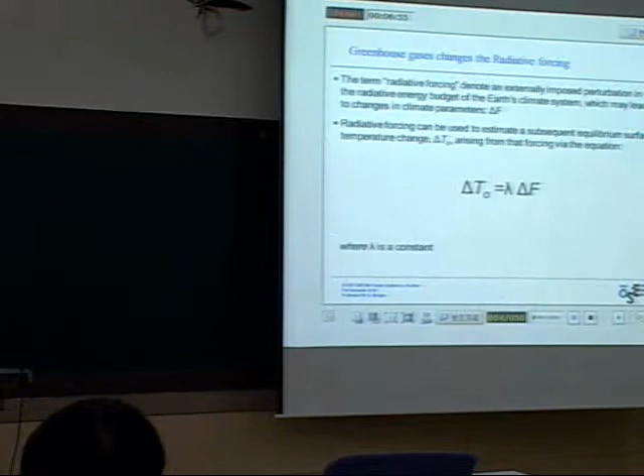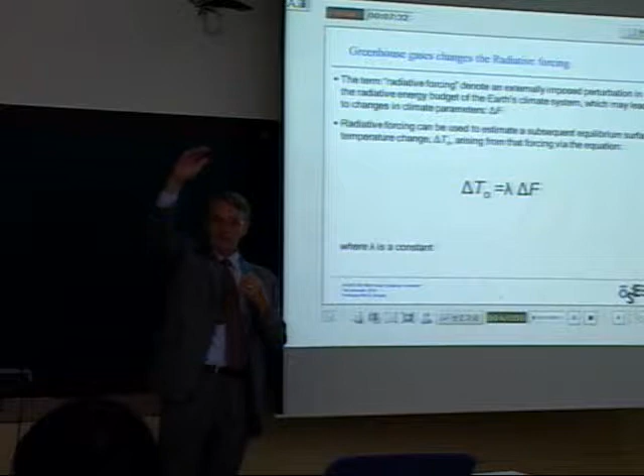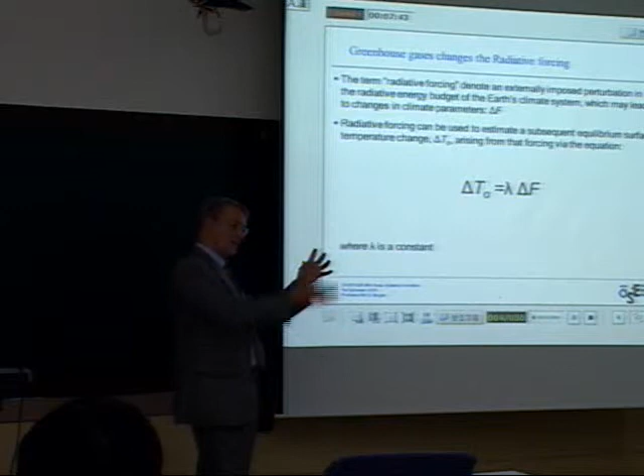So there's really a lot of very complicated technology going into this. One of the most complicated things is also the chemical reactions that take place in the atmosphere under certain conditions. One is also talking about the half-life time of these gases. For instance, when you send CO2 up into the atmosphere, it doesn't stay there forever. It's gradually disappearing, but of course we are feeding all the time more and more CO2 into the atmosphere. So it's kind of the net effect of disappearance and feeding new CO2 that is the mechanism.

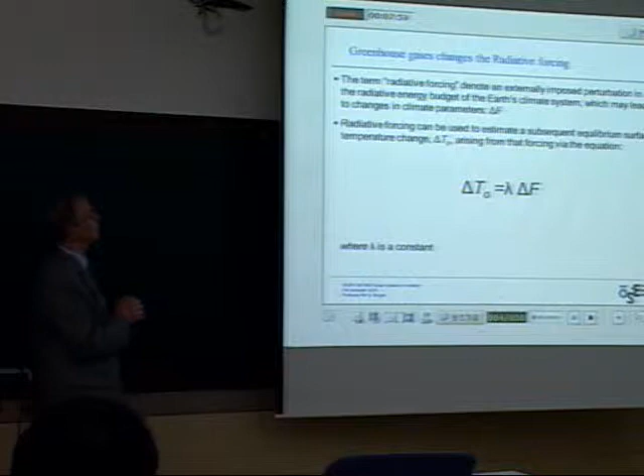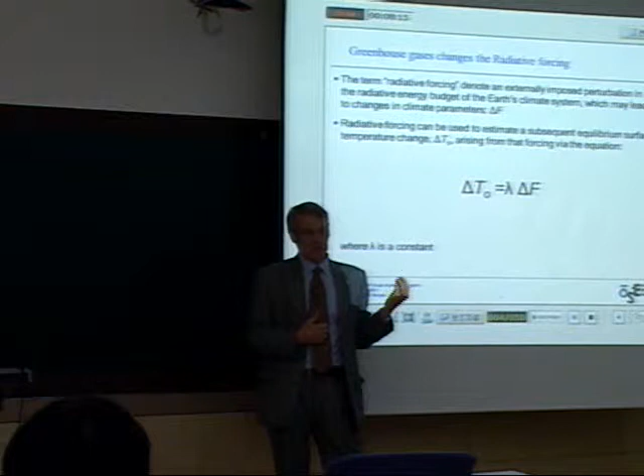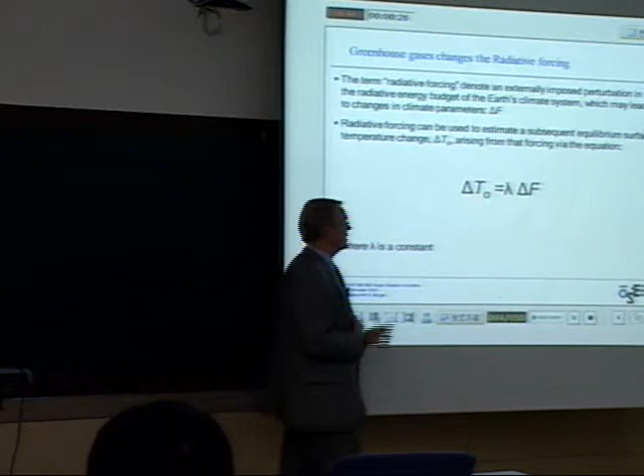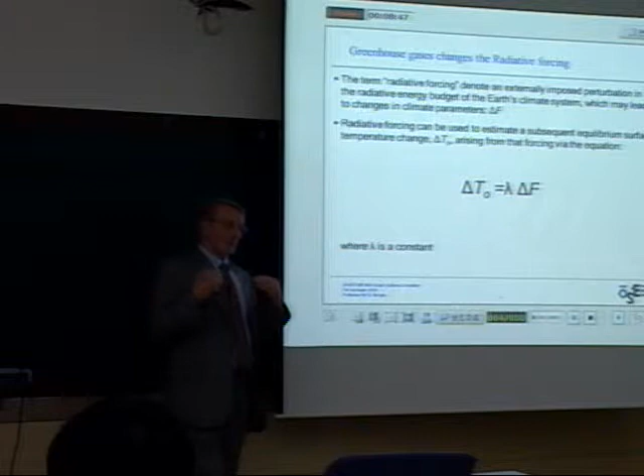But one can also go from this forcing function that we just talked about into what does it mean in terms of temperature alteration, change of temperature on the Earth. And even though this is an extremely simple equation, the reality is very much more complicated. As I said also the last time, these mechanisms are not fully understood. And this, for instance, the CO2 cycle, where the oceans are a very important part of the CO2 cycle, is not fully understood yet.

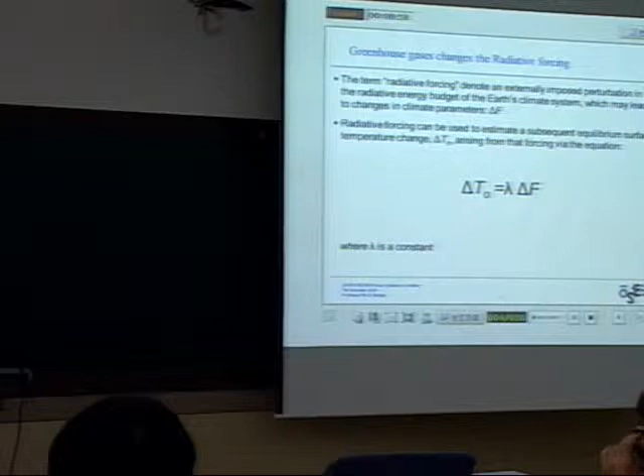So let's look more and more into shipping now. What do we have on our conscience when it comes to pollution? Well, CO2 emissions from the world fleet has been steadily growing.

One can make projections based on these scenarios. We talked about the IPCC, the Intergovernmental Panel on Climate Change, and they have made different scenarios. Depending on which one turns out to be right, one can forecast smaller or bigger growth of CO2 emissions.

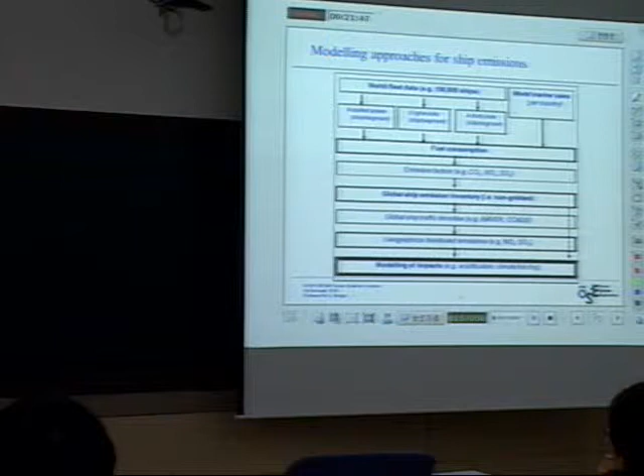Of course, if you are going to put the resources in the right places to improve environmental performance, you have to understand what is going on. One can put together a mathematical model for the world fleet. We have data for the world fleet - we know something about the power, the engine, and how the various ships operate, how much they have to transport - and on that basis you can estimate fuel consumption, and on the basis of engine data and fuel data you can say something about emissions.

You can say something about how much is emitted altogether. But if you know something about where the ships are trading, you can also say something about where you have most traffic and where you have most emissions, and thereby you can model the impacts. When it comes to pure climate greenhouse gases, it doesn't really matter where you emit them, because they go up in the atmosphere, and that's where they do the damage.

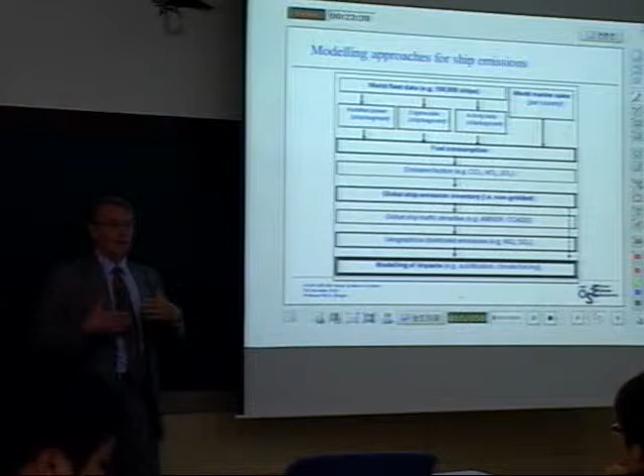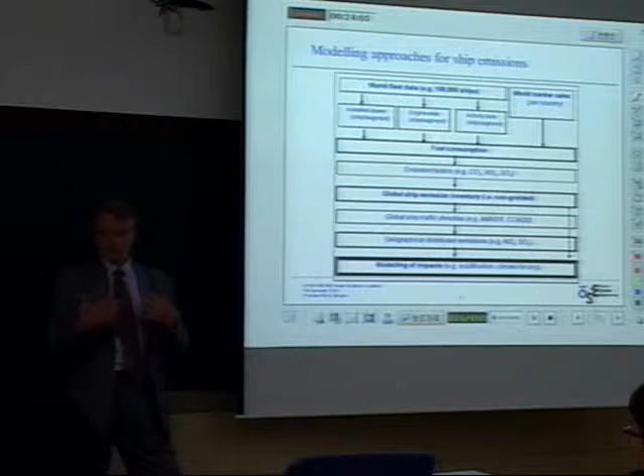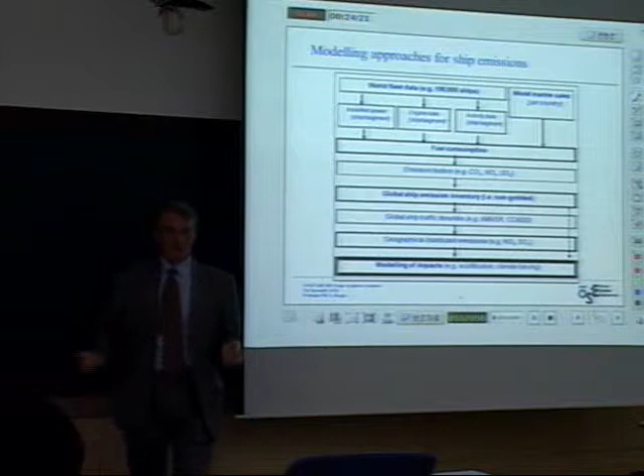But there are other aspects, like sulfur particles, and in one way shipping is a good thing, because most of the shipping takes place far out at sea. Whereas if you think of transporting by truck, where do the trucks run? That's where people live. So emissions from trucks or cars are much worse than emissions from ships that trade internationally, because you have the local effects of pollution - not only particles and chemicals, but noise pollution and safety aspects. So we shouldn't forget that shipping also has many advantages when it comes to moving large volumes of cargo.

But anyway, the point here was that we can make models, and on the basis of the models, we can also feed this into what's happening in relation to the scenarios. I won't spend too much time on this, but if you're interested there is literature you can study on this topic. For instance, when you know where the ships are trading, and the frequency and size of the ships, what the engines produce in terms of pollutants, you can make maps.

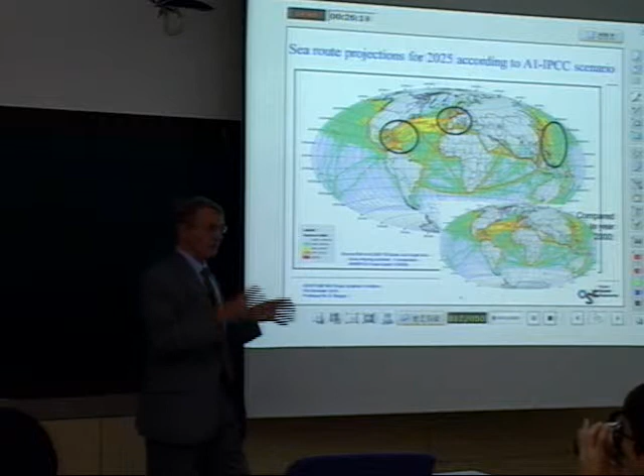You can see very clearly where these emissions take place. You can also not only look at the totality, but look at the growth and the areas that have the worst impact. If you talk about regional trading, one can come up with transportation schemes that are more efficient, and that has to do with fleet utilization - how you utilize your ships in order to have as much efficiency as possible in your fleet.

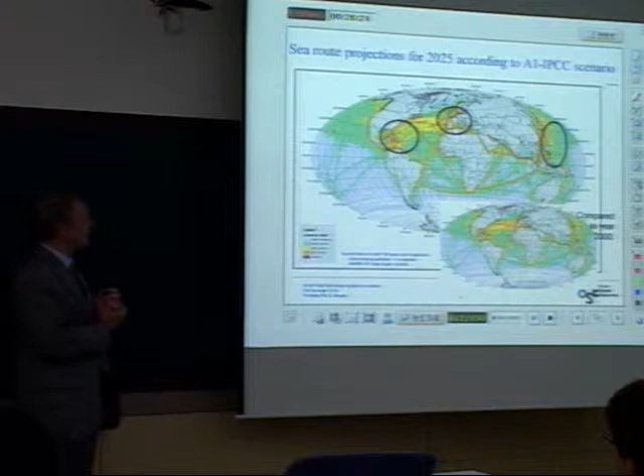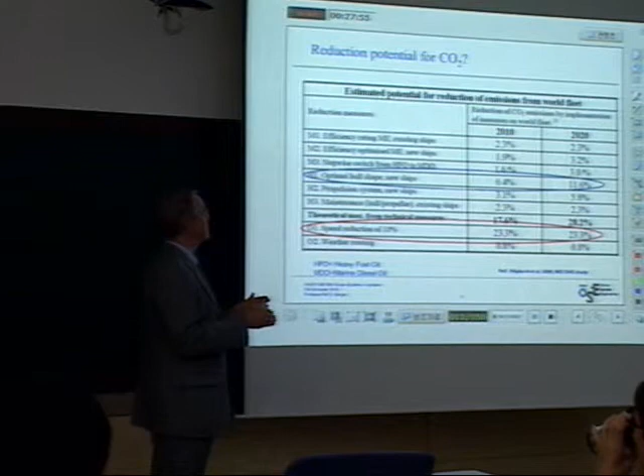And this is compared to year 2000, and this is based on an article that was published in the year 2000. So in one way it's a little bit old, but what we can see now with modern ships is that we are about to reach this kind of improvement compared with ships from year 2000.

And when it comes to hull shape, there's a significant potential for saving fuel by reducing the resistance of the ship. And of course, what you do typically in the ship model tank is to optimize the shape of the ship, including the bulb and the aft part of the ship, how the inflow to the propellers works and that sort of thing.

So there is a significant potential. And if you say 10%, well, 10%. Of course, if you look at the world fleet, and if we really were to have optimized ships, and because of the shape they use 10% less fuel, that's a tremendous saving. So these numbers really add up.

Propulsion systems, maintenance of the hull propellers, that has to do, for instance, with marine growth and the surface being, you have more surface friction and so on.

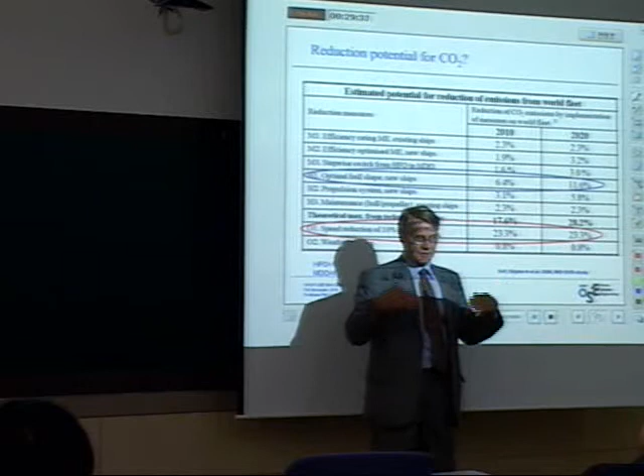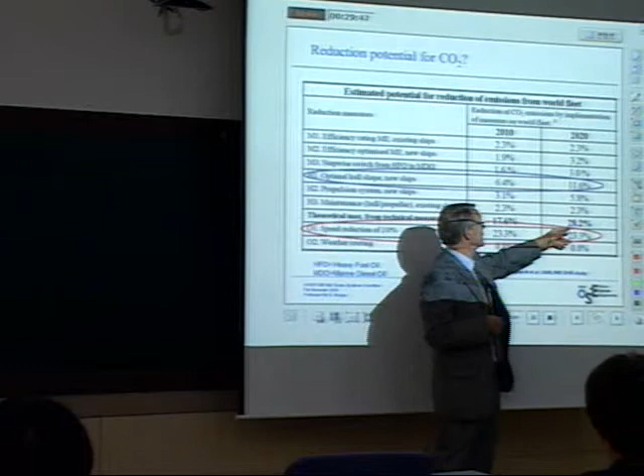From purely technical measures, according to this study, and of course it's not necessarily the ultimate answer to this problem, but it is a good indication, and the indication says that it will be possible within a few years to save about 30% of the fuel if we were to implement all these various actions that are listed here. That's quite significant. And then there's another one.

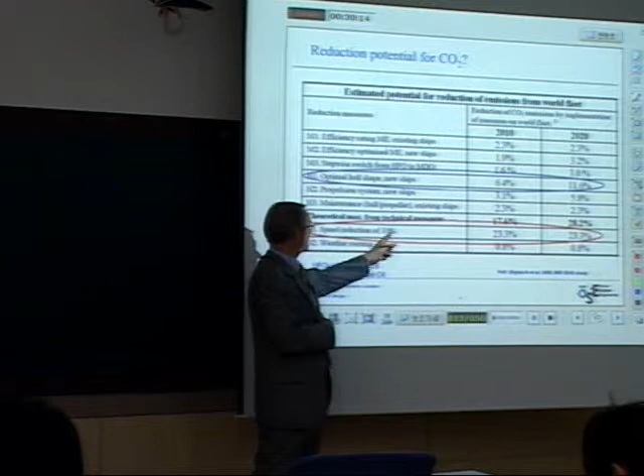And this is also about to happen now, and that is speed reduction. It's kind of the opposite of old thinking, right? The old thinking was, if you go faster, of course, then you can transport more on the ship because you spend less time going from A to B, and thereby you can cover a longer distance and more ton miles in a year.

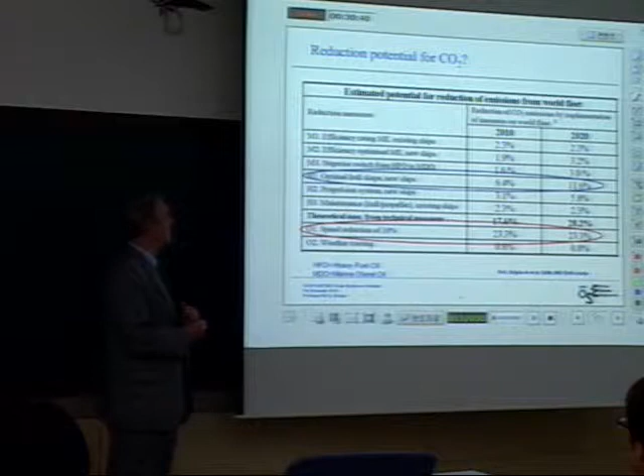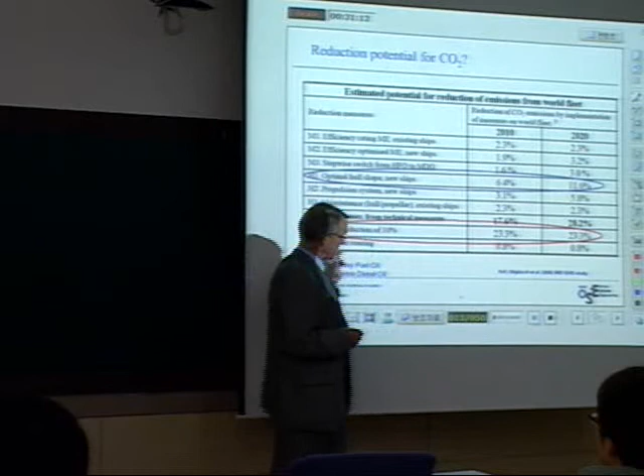But for various reasons, one may be, let's say, the will to reduce pollutants. Another one is that the fuel price is going up, right? So what is economical is not necessarily the same answer now as it was some years ago. And there's a small potential for improvement also if you try to avoid severe weather conditions and so on.

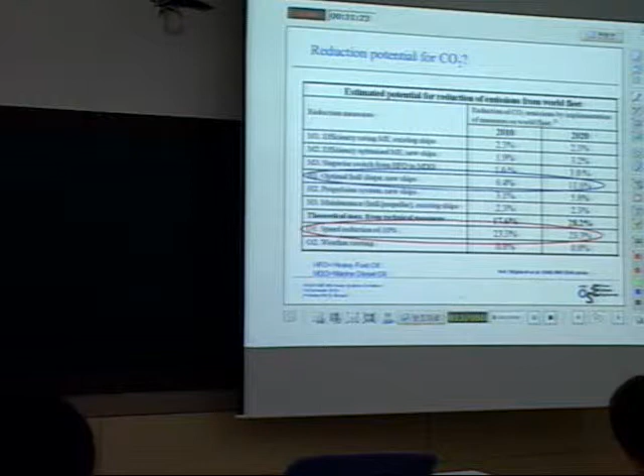But it's quite interesting. If you look at some of the trades, for instance, ships going to Australia, they go full speed to Australia, and when they come to Australia, they find that they have to wait 10 days before they can unload their cargo. That doesn't really make sense, does it? But they go full speed because they want to have a certain slot in the queue, right? The earlier they come, the earlier they can deliver their goods. But if you look at it as a system, it's really ridiculous.

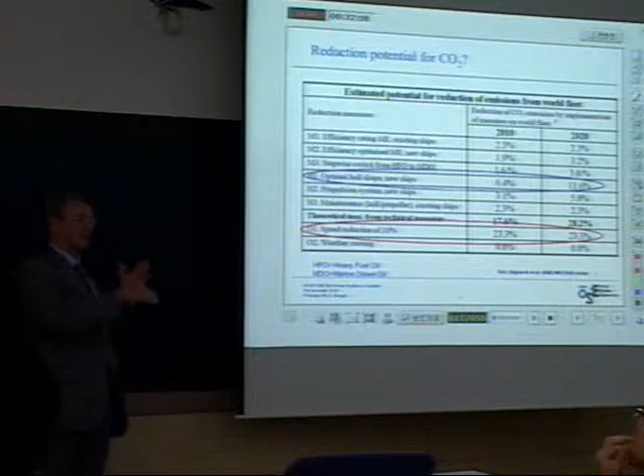That ship could have gone slow speed, been there just in time to do the unloading, right? It saved a lot of fuel. But that's not the way it is. So things have to play together.

Do you know the expression a cluster? In economical modeling and, let's say, modern management theory, one's talking about companies being part of a specific cluster. And that is, a cluster can be organizations and companies of various sorts that are playing together. And in shipping, more than almost any other industry, clusters are extremely important.

And there are many organizations that have to play together when it comes to carrying out the international shipping operations. So you have the shipyard owner, the crew, the operator, which can be different from the owner, the cargo owner, you have the port authorities, the canal authorities, interaction with inland transport, designers, equipment suppliers, universities, authorities, class, fuel, brokers, selling, buying. So it's a very complicated cluster.

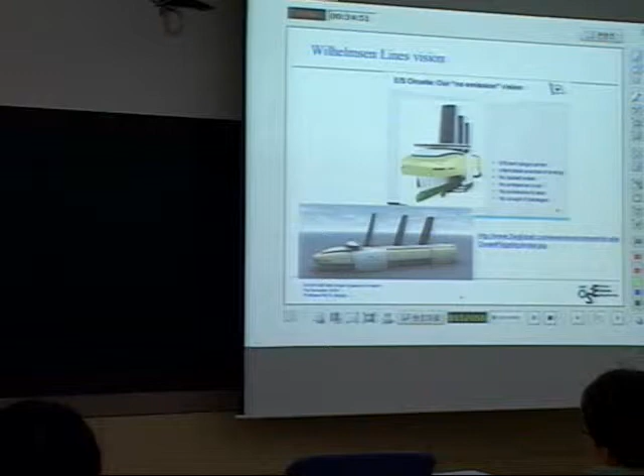We talked about it becoming more important to do profiling. There's one ship owner in Norway who's done this to a very large extent at a relatively low cost, because they had an internal project on the emission-free ship, which they called, for some reason, Orcelle. I don't know why they called it Orcelle.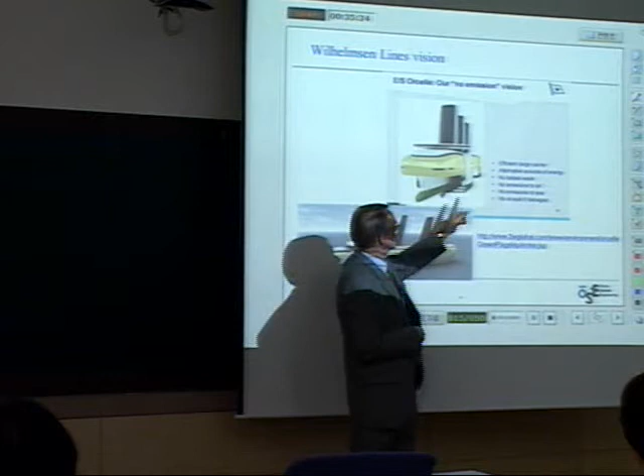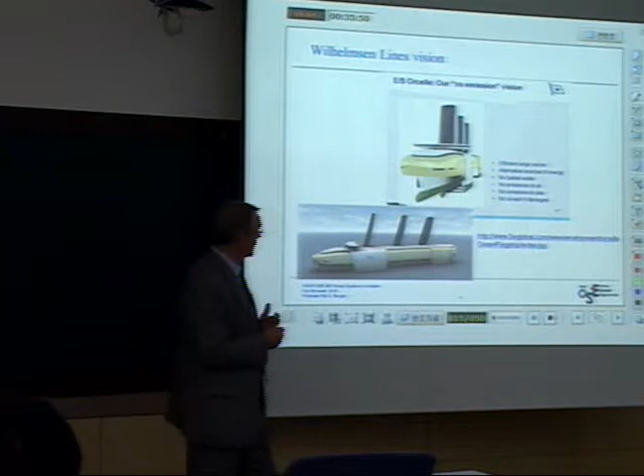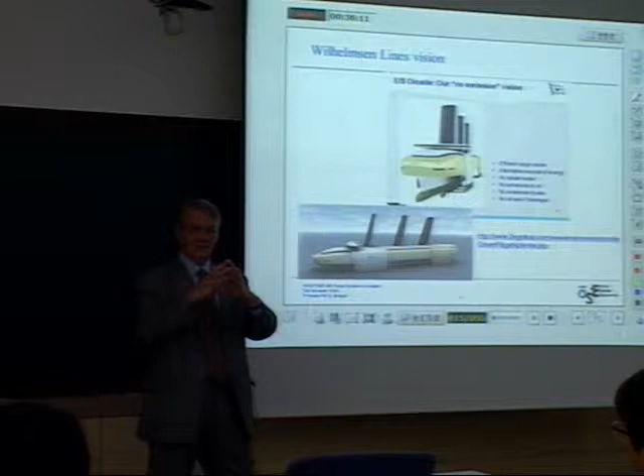It should be an efficient cargo carrier, some kind of bulk or mixed cargo ship, using alternative sources of energy. You can see something here that looks like sails, or at least wings or airfoils, covered with solar panels, what's called solceller in Norwegian, or photovoltaic cells, which convert light into electricity.

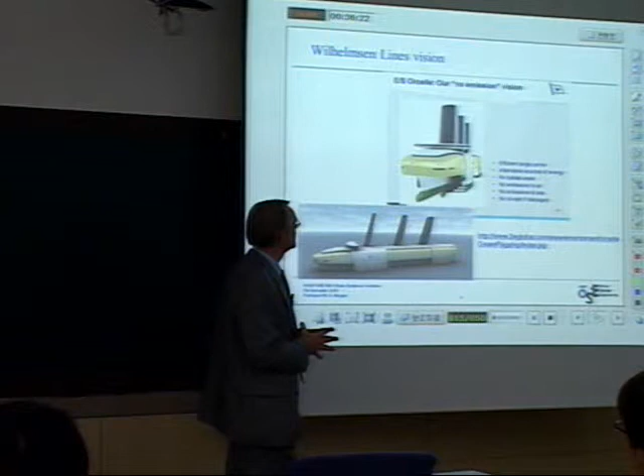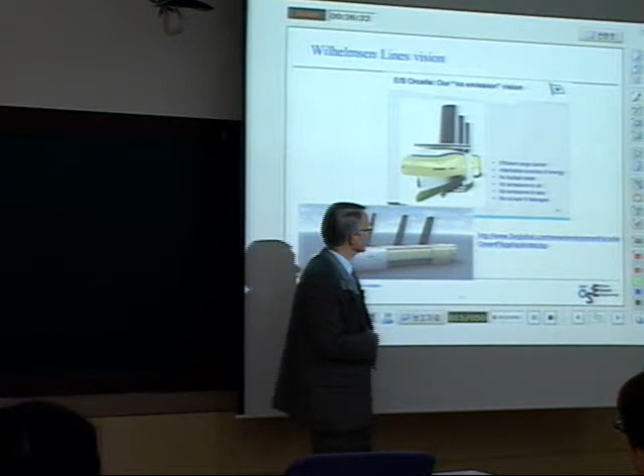No ballast water, and it's certainly possible to have a ballast water-free ship. No emissions to the air, no emissions to the sea, no oil spill if damaged. I've included the website if you want to look further into this.

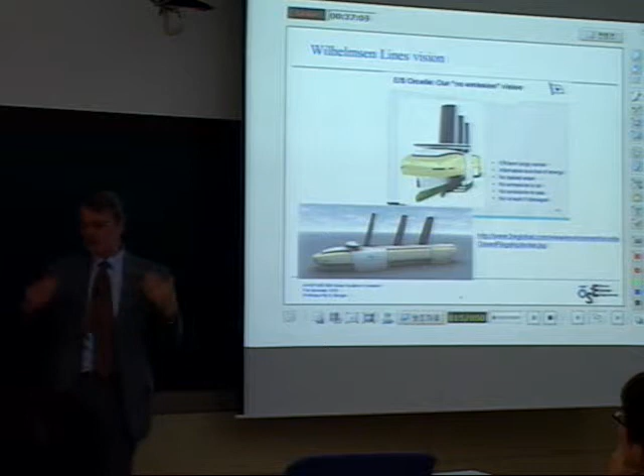But in reality, this particular thing is more than anything the public relations department of the ship owner that's been pushing this. We are quite far away from seeing such a ship today. But I think it's important to have a vision, and this is a good vision, so one can go ahead with implementing certain aspects of it.

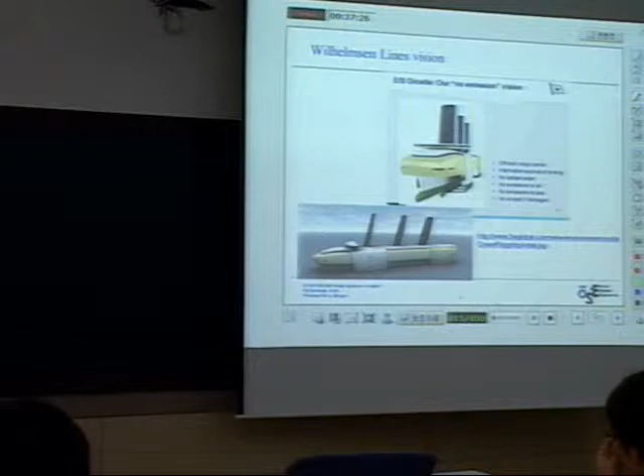We talked about ship speed, and when it comes to resistance of a ship, you'll see that the resistance is also tied to something called the Froude number, and some of you may know about that. But in essence, the larger the ship is, the more efficient it becomes in terms of resistance in relation to its size.

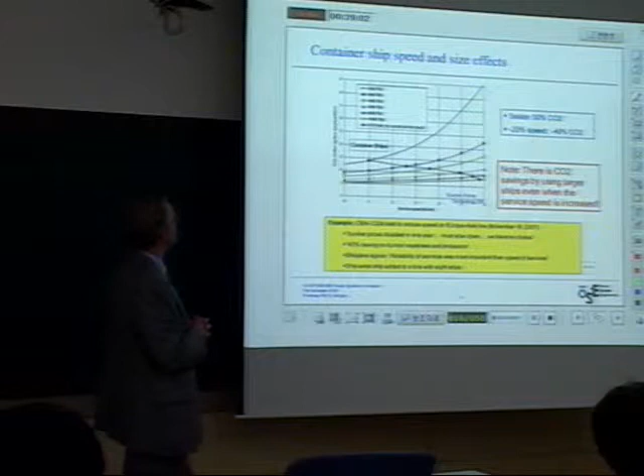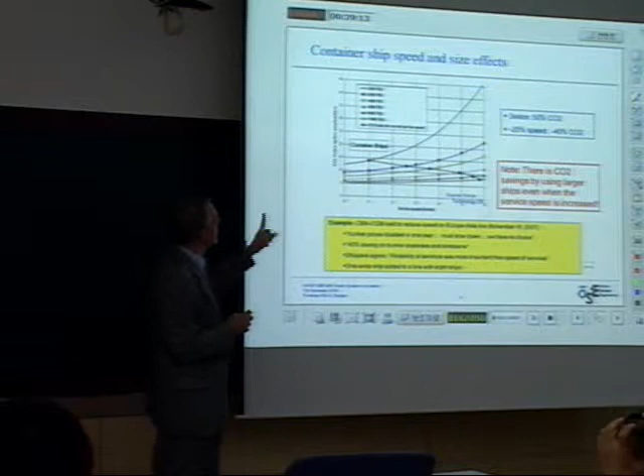There are different sizes of container ships, from 2,000 TEU, which is the standardized container unit, up to 3,000, 4,000, up to 10,000, and today we have ships up to 15,000 TEU. But you can see, of course, as the ship gets bigger and bigger, the amount of CO2 per unit and transported length goes down.

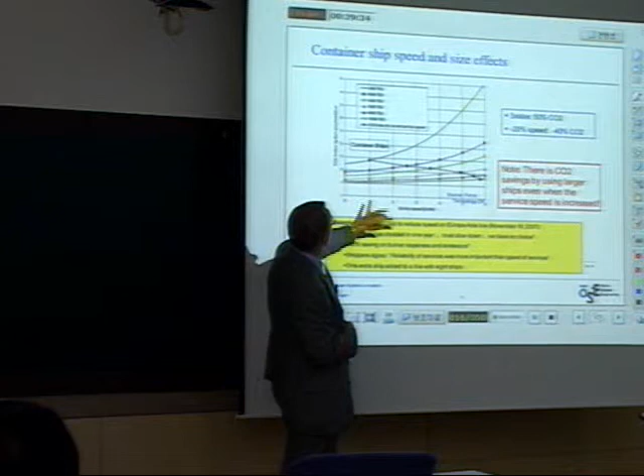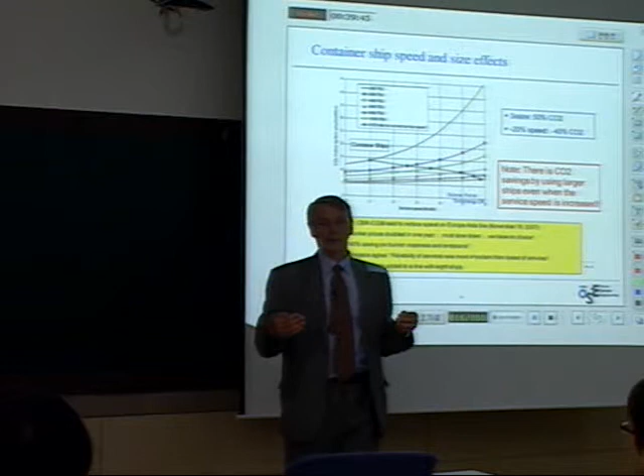You see these curves, and here we have the different speeds. Typically a small container ship would operate with a lower speed than a large container ship. So the black curve shows the typical average speed of a ship of a given size.

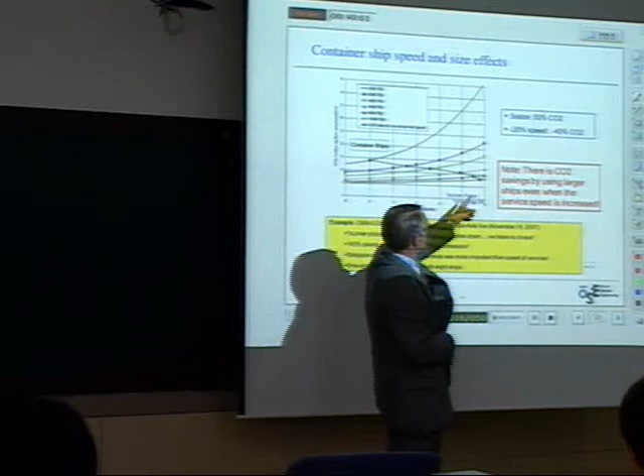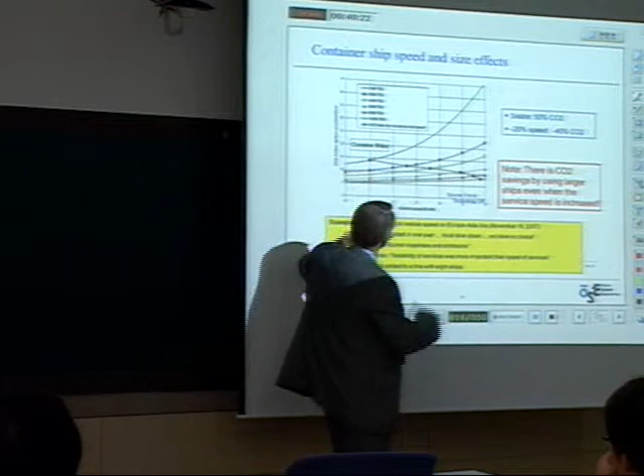It's clearly an advantage to go slower, as well as having a larger ship. So if you go slower, you move down the curve for the various types of ships. We also see from this that it's quite advantageous to have larger units, and of course, larger ships going slower.

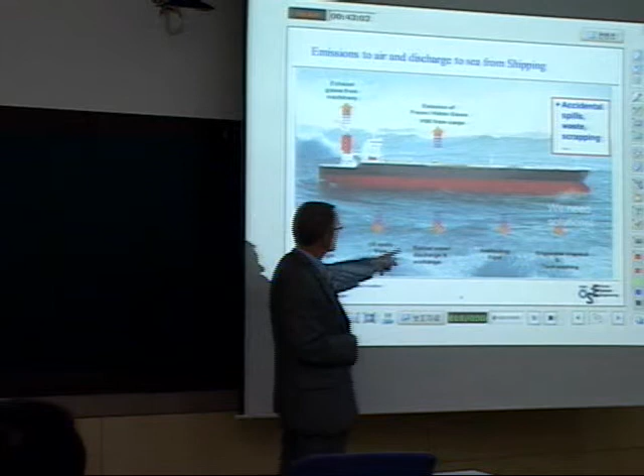So what goes out of the chimney, we have to some extent talked about. We have emissions from various gases on board and vapor from the cargo. We have sewage, garbage, oil spills from the engine room, ballast water, and we'll talk more about that. Anti-fouling paints have toxic components which can damage the environment. Bilge water and tank washing also can give some very bad discharges to the sea.

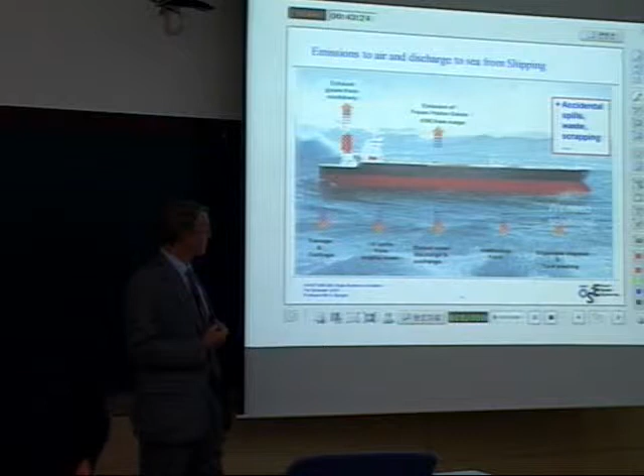So it's a very, very many-faceted problem, and one has to be concerned with all of these various factors relating to the environmental performance of ships.

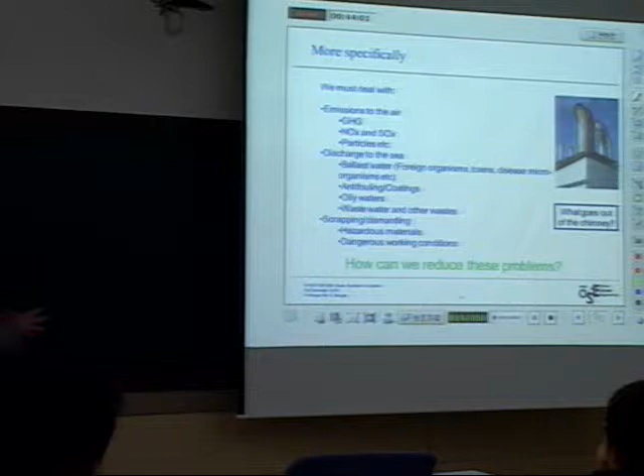So this is more or less the same sort of thing listed: greenhouse gases, NOxes and SOxes, particles, ballast water, antifouling, oily waters, wastewater, other wastes, and of course also in the last phase of the life, when the ship is brought to shore to be scrapped, there are many dangerous materials that certainly have to be handled in a proper way.

And we have seen some numbers for how much you can gain. Remember that chart with the potential savings you can get from improving within these different segments of performance.

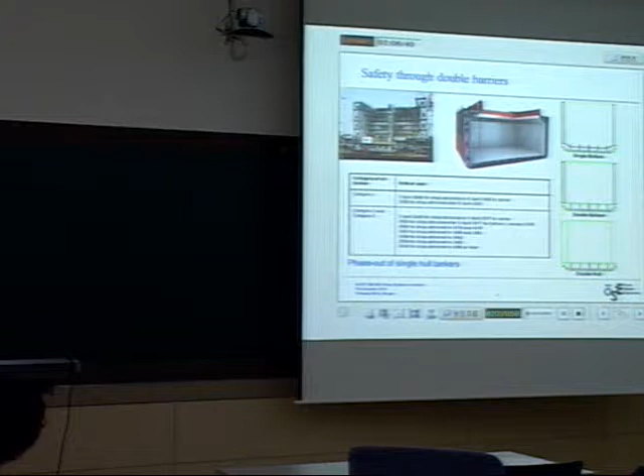And when it comes to the more physical barriers as part of the safety system, I'm sure you're all familiar with the concept of a double skin or double hull design, which has been an evolution since the first tankers had only a single layer of steel as the barrier between the cargo and the sea. Here you just see some of the framing inside. Then the concept of double bottom.

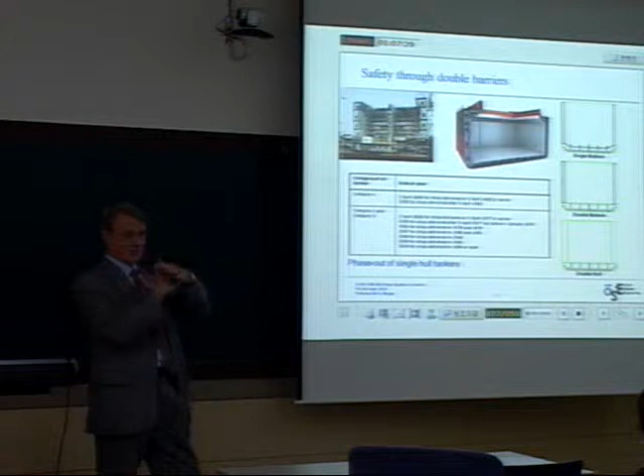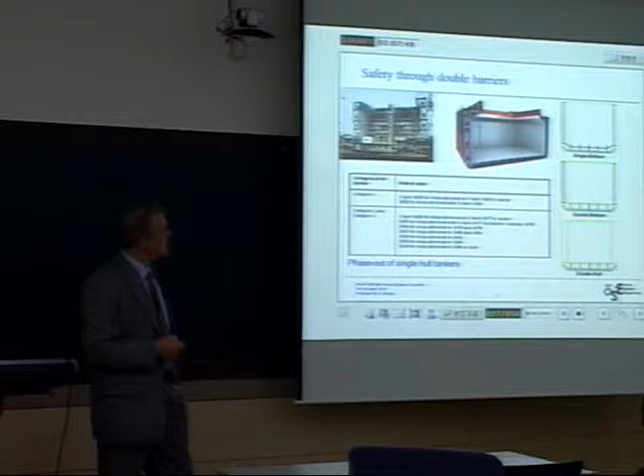When does that help? When you run aground, right? Typically you hit into a rock or something, so that is good for that purpose. And of course, if you also have double sides of the ship, then you also have two barriers in relation to collisions.

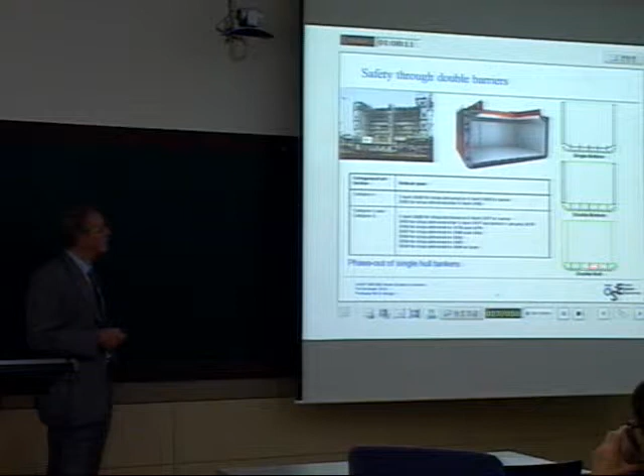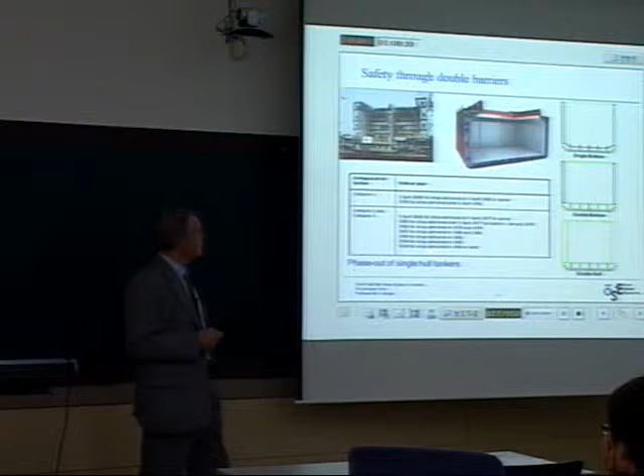So the requirement now is for all new ships, tankers as well as bulk carriers, to have a double skin, double barrier. And according to IMO, ships of older type that do not have the double barriers have to be phased out. 2010, this year, is the last living year, so to speak, for ships that were built in 1984 or later. So by the end of this year, we should not have any single skin type oil carriers.

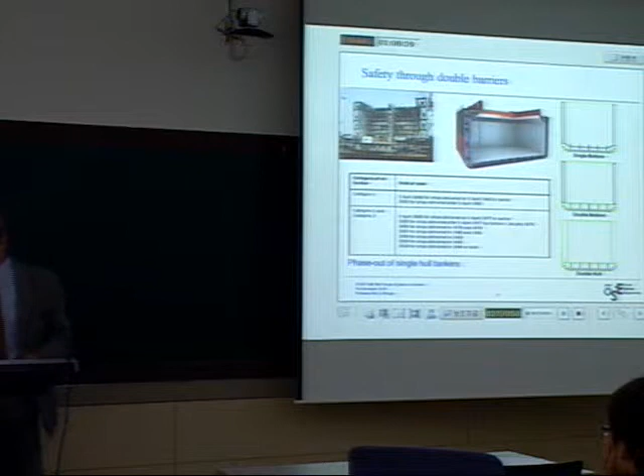The propellers have to be down in water in order to work. And there have been some cases where ships have gone out to sea with the propellers only partly submerged, and then they have hit a storm, bad weather, and they haven't had enough power, so they have gone aground - the wind has carried them to shore. So it's very important to have sufficient draft, be deep enough into the sea for the propellers to work, as well as stability.

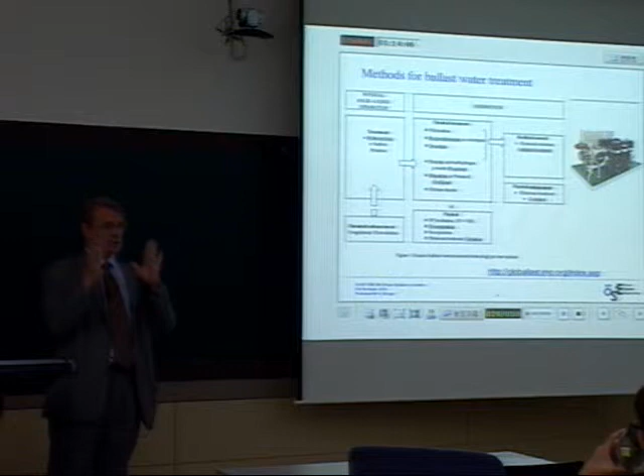But one can also use ultraviolet irradiation, deoxygenation, gas injection, and ultrasonic treatment. There are systems where you make so much acoustic noise in the water that you kill the microorganisms or bigger organisms simply by sound. So it's worse than earplugs.

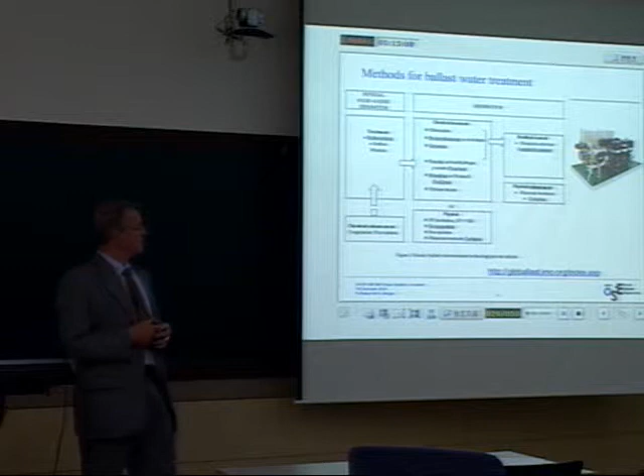So there are many systems, and this you may want to look into, some of you, in connection with the homework you're getting.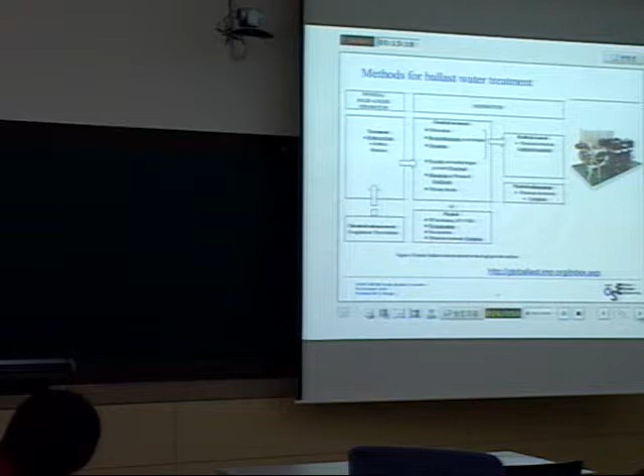For the cruise industry, dealing with waste sewage is a big challenge, because it's not acceptable to dump this waste into the water. If you do, you'll probably get the coastal state or port state on your neck, and you'll be fined. So this has to be dealt with through procedures and systems on board.

There are many types of garbage, and I also mentioned recycling as a source of pollution and quite a challenge. I'm a little surprised there hasn't been more technological development in this aspect, because the way scrapping of ships takes place nowadays is that, in many cases, these old ships are brought to India.

Have you heard about this? They're run on shore, on the sandy shore, and then people come out and by mechanical means and with burners, they cut out the steel pieces and various parts of the ship, with very low tech help. It's very dangerous work, a toxic environment, and not a good way of dealing with it in relation to the beaches either. But that's how most ships are dealt with today.

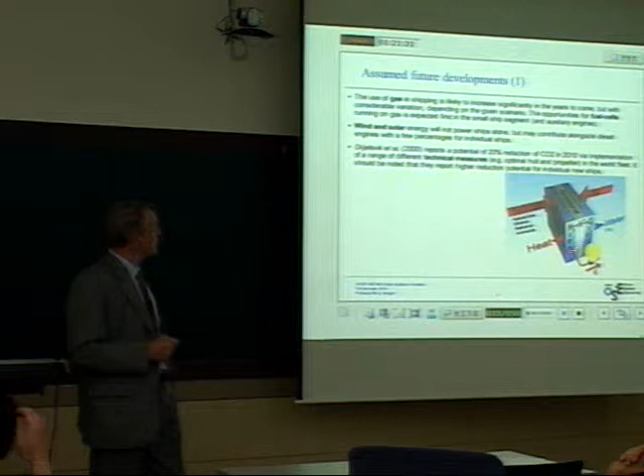We have fuel cells, for instance, and if we go back to this report by Skjølsvik that I showed you, what is the potential of reducing emissions by technical measures? Fuel cells could be one such technology.

Marine diesel engines, more and more, rather than burning these sticky heavy oils. One problem with ship engines and the heavy oils used is that not only is it low quality oil—in some cases the oil is so heavy you can shovel it with a shovel, you have to heat it up before running it into the engine—but it turns out that some sources delivering marine fuels mix toxic wastes into the oil. That's one way of getting rid of problem materials, and that, of course, is very bad.

When it comes to fuels, the sulfur content is very important, and there are new regulations coming for reducing sulfur content in marine fuels, which is a very good thing. But what I have heard is that if one were to implement that regulation right now—and it is coming in a very short time—there is not sufficient refinery capacity in the world to deliver all these much cleaner fuels and bunker oils for the ships. So things are very often not quite as simple as they may seem.

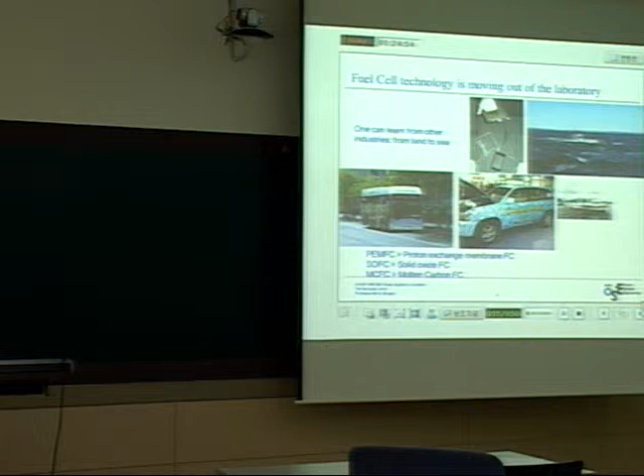But there have been some projects. There was one in Norway I would like to mention, called Fellowship, a consortium of industrial participants including DNV. The first ship with a major installation of fuel cells is this one—the Viking Lady—delivered last year. The auxiliary power, not the main engine but the other energy needed on board, was installed with fuel cells. It delivers 320 kilowatts, it says here.

It runs on liquefied natural gas. Of course, you can also use liquefied natural gas or natural gas in a combustion engine, which is simpler. But with a fuel cell, you don't get the same amount of CO2 release as you get when you do it in combustion.

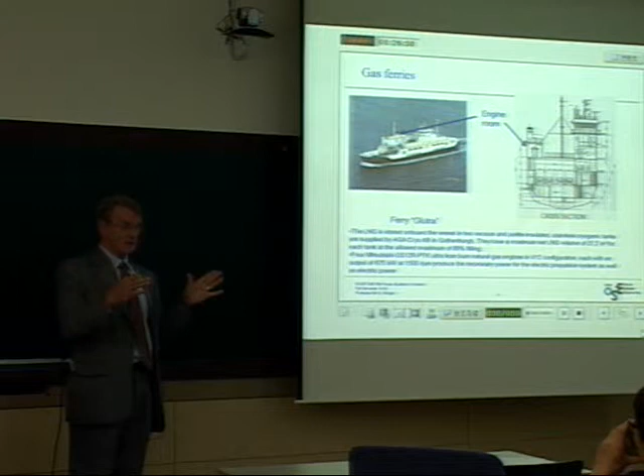Gas ferries—I think in Norway we have pioneered gas ferries. This is the first one that was delivered about, I think, 9 years ago. Now there's a series of ferries in Norway running on LNG, and there's a system being installed along the coast with stations for storage of LNG on land, so refueling is becoming more and more available. These have much less release of CO2, so it's much more environmentally friendly.

I showed you another picture of Fjord 1—I think that's the latest in this series of gas ferries in Norway. I'm sure you can find that on the web, also in English. I think that Fjord 1 ferry carries about 250 cars and 500-600 passengers, so they're becoming significant-size ships.

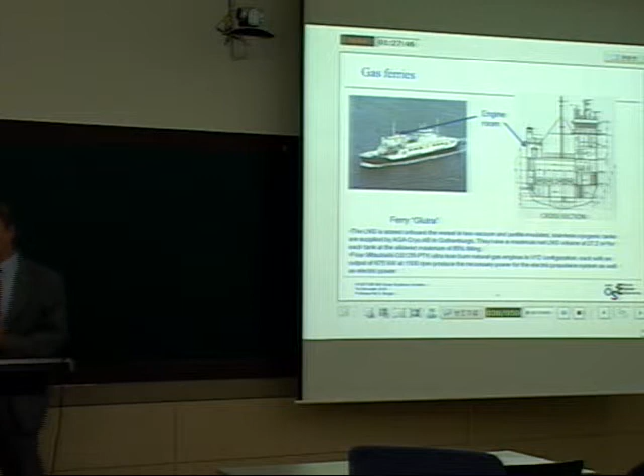Then there are some more fun things like kites, and there are several ships now that have these kite installations. You have to have a mast for launching the kite. I would think this is something that seems attractive both in China and Korea, where you have traditions for flying kites, and many places in Asia. But these are supplementary—you couldn't base the propulsion of the ship on kite power, because sometimes it's not blowing that much, but out at sea, generally the wind conditions are much better than on land.

It also depends on which direction you want to go—if you're going straight towards the wind, I think you'll have a problem with the kite. But you don't have to go exactly with the wind either; as long as the kite has a power component in the direction you want to go, it is a help. I'm not sure if one can say this is commercially viable at the moment, but maybe in the future it will be a supplementary power source for a ship.

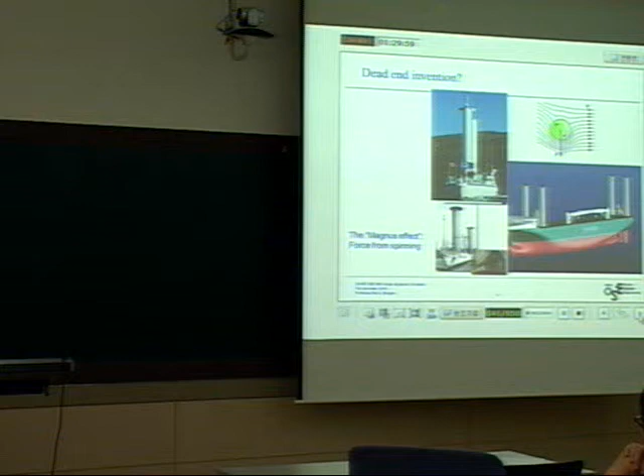There are some interesting things. For instance, if you have a cylinder and you spin it and there's a wind blowing, where the surface is spinning in the same direction as the wind, the pressure will be less and you get a force in that direction. That's called the Magnus effect. When you play tennis, you have the motion of the ball, the relative motion between the air and the ball, and if it's spinning you get this transverse force that makes the ball curve. That's the same type of effect.

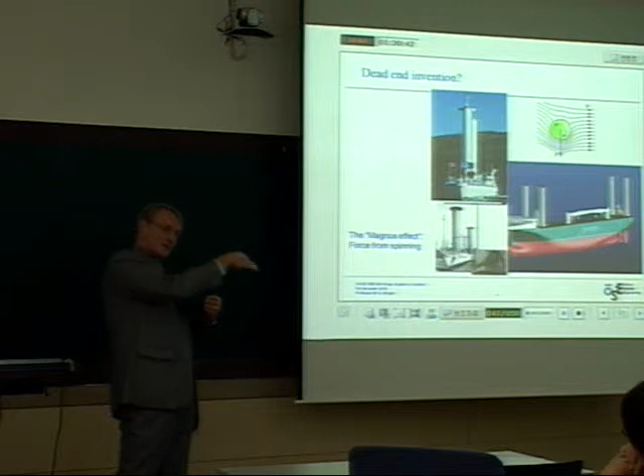So there have been some designs where you have these big masts that are really spinning cylinders used to generate propulsion. But I think this is not so very promising, because you're dependent on having wind, and it's a rather big mechanical installation on the ship. But it's kind of interesting that just by spinning a thing, you get a force to move the ship.

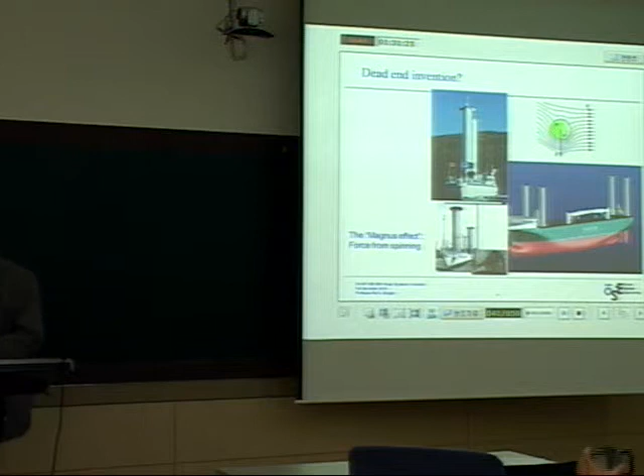And we'll get back to some of these things later on when it comes to high-speed craft. You can reduce the resistance by having an air cushion under the ship, and thereby you don't go so deep into the sea, so the lifting effect could be useful.

This is one thing I picked up, a student project in Gothenburg, at Chalmers University in Gothenburg, Sweden. They had a design project for a ferry system to shuttle people across the Göta River in Gothenburg, looking at a system with batteries and solar panels, low resistance. So it's possible to do interesting student projects in this area.

They called this one Elvis, like Elvis Presley, but 'Elv' in Swedish means river, and this was a river shuttle, so it was a kind of fun name for their project.

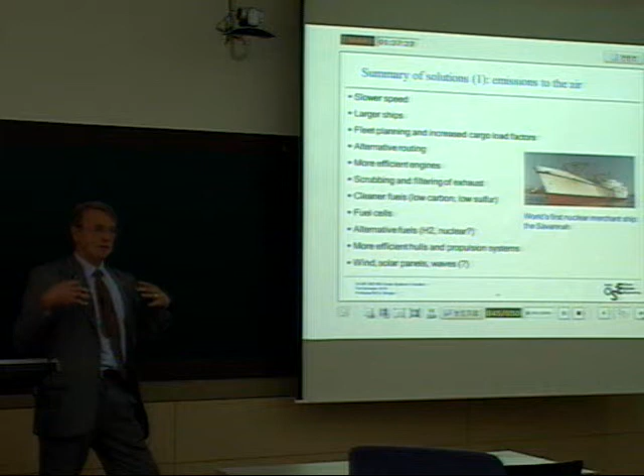But the public image of nuclear power is still tarnished. It has been damaged by the Chernobyl accident and the Three Mile Island accident, and there's been a massive popular movement against nuclear technology. But now people are more and more beginning to see that it could in fact be environmentally friendly if all the nuclear materials are dealt with in a proper way, including storage after it has been used on board.

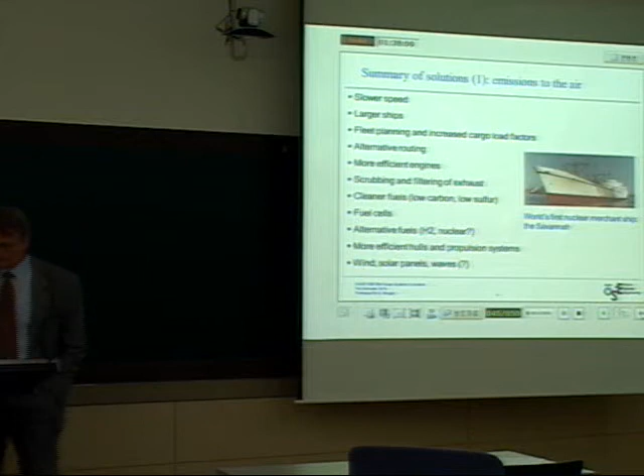So that's emissions and the discharge we talked about. So this is the summary now: ballast water, dealing with that through mechanical, chemical, physical ways, more friendly coatings for the ship, and ballast-free ships.

This is one idea where you actually just open up some channels under the ship and let the water stream through. I don't think it's completely safe with regard to not bringing alien species or organisms from one place to another, because one can imagine them getting into the ship, staying there for a while, and then coming out again. So I'm not sure, but in one way, at least you get the flushing of the water that you picked up at port.

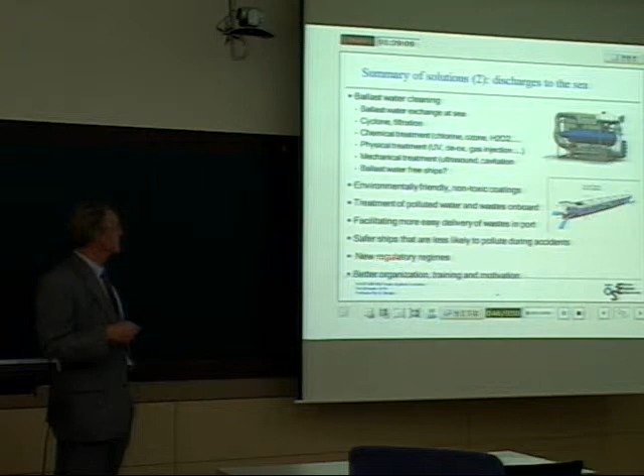Dealing with waste at port. Ships that are safe when it comes to pollution during accidents. Regulatory regimes, better organization, training and motivation - all of these are important things.

So improve the current technologies, search for new technologies, and be innovative, which fits exactly with this course, doesn't it? So if we were to go back a little bit in relation to what we started with in this course, being systematic about innovating.

There was something called the Osborn technique. Maybe you don't remember any longer, but it was kind of a 7-step recipe for dealing with being creative: define the problem, find facts and data, analyze, assess relevant data, start idea process, involve expertise, and you have to prioritize. If you have several ideas, try to sort out the good ones from the bad ones, and go or no-go when you start the development.